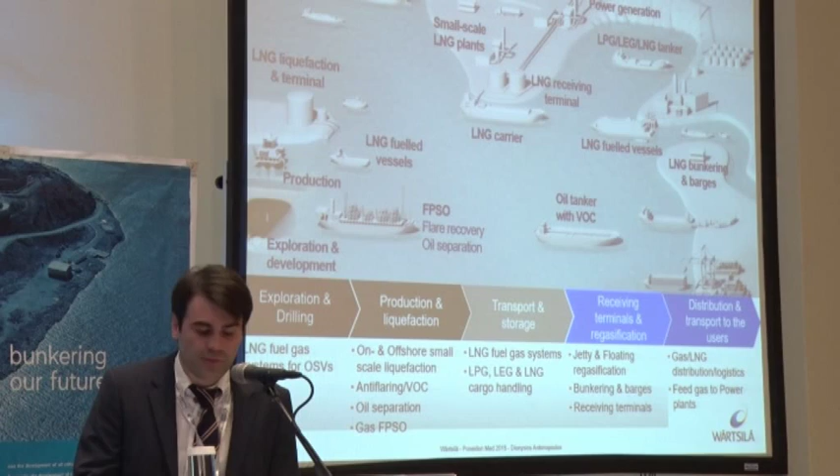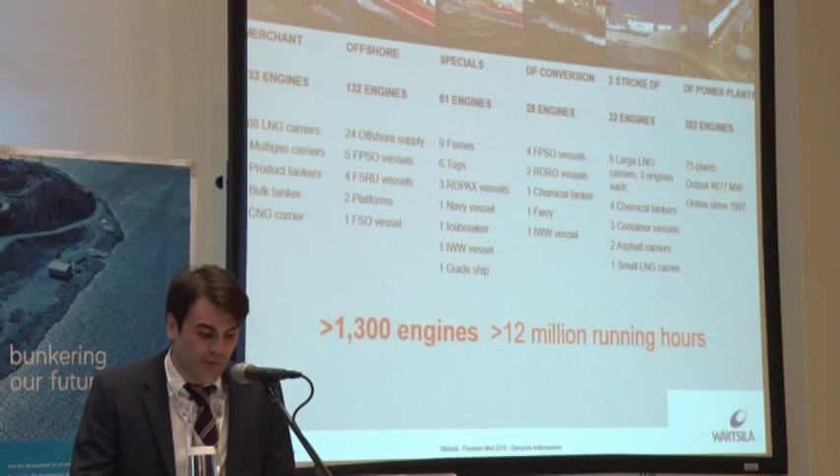Why LNG as marine fuel? This has been discussed several times today. Of course, it offers a fuel compliant with legislation and emissions, and it can be cheaper. For new building, all major ship designers are able to offer a vessel with LNG as marine fuel for many merchant vessel types. Wärtsilä has very extensive experience in dual fuel applications, with many accumulated hours. We have more than 1,300 dual fuel engines, and we have accumulated more than 12 million running hours.

And on this, I would like to state that we have many Greek LNG carriers that are equipped with the dual fuel Wärtsilä four-stroke engines. It has been very impressive, the investment of Greek owners from 2010 onwards in LNG carriers, and nowadays they have approximately more than 10% in terms of number of vessels of the global LNG carrier fleet. With the forthcoming deliveries, this approximate 10% will rise. So it's quite impressive what the Greek owners have achieved.

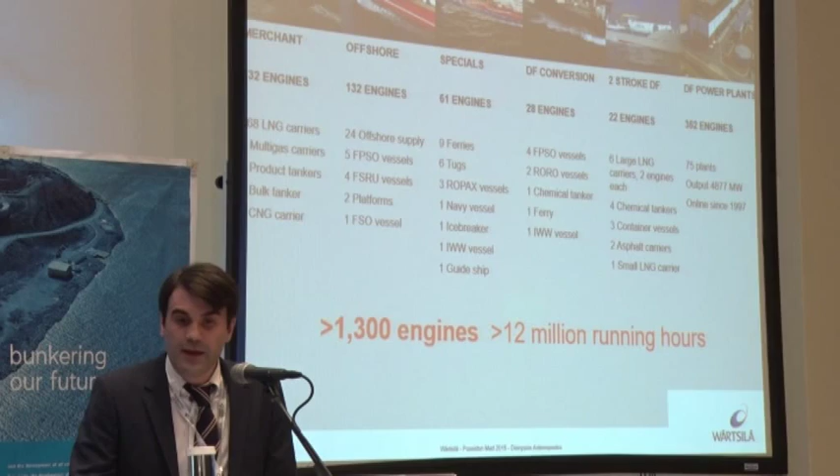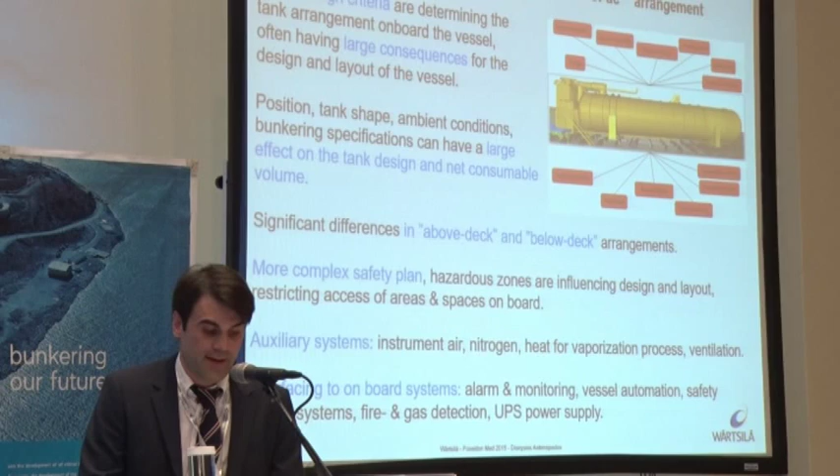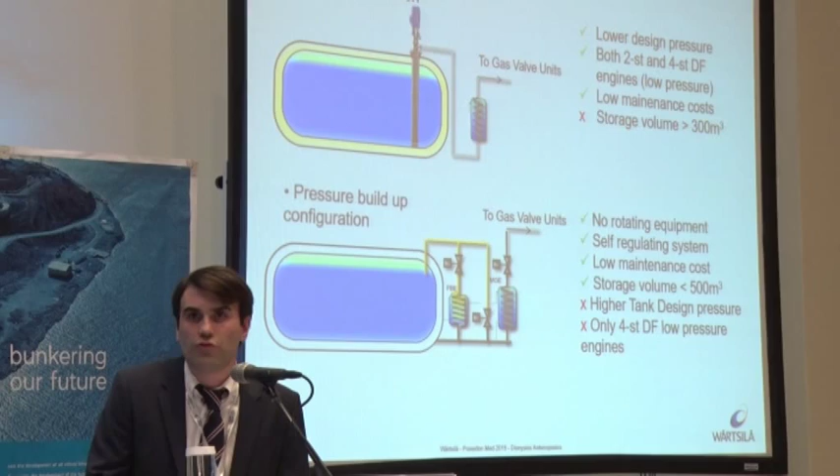The challenges of LNG as marine fuel. As has been mentioned, it has certain challenges. Efforts from many different parties, such as class societies, manufacturers, and others, have made LNG feasible as marine fuel. Especially for conversion, integration of various systems is a challenge, but with good preparation, this can be overcome. Many design criteria determine the tank arrangement on board the vessel, often having large consequences for the design and layout of the vessel. There is a significant difference between above deck and below deck arrangements. We have two types of tank process systems, one with pump and one with pressure buildup. Each solution has advantages and disadvantages.

Now, regarding conversion, we can proudly say that we have achieved the world's first gas mechanical conversion, and this chemical tanker has been converted from conventional diesel fuel to LNG. Two tanks have been placed on board, each having a capacity of 500 cubic meters, and of course the engines have been converted in order to be able to burn LNG. The conversion work lasted 10 weeks from the arrival at dock to handing over the vessel to the owner after successful first bunkering and gas trials.

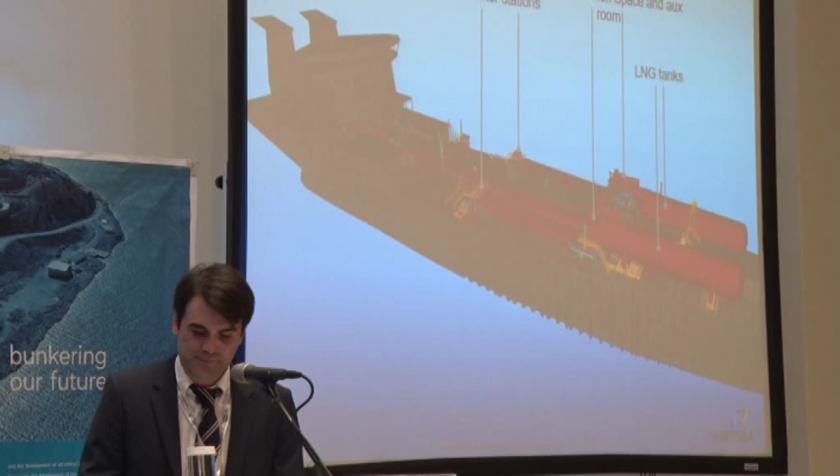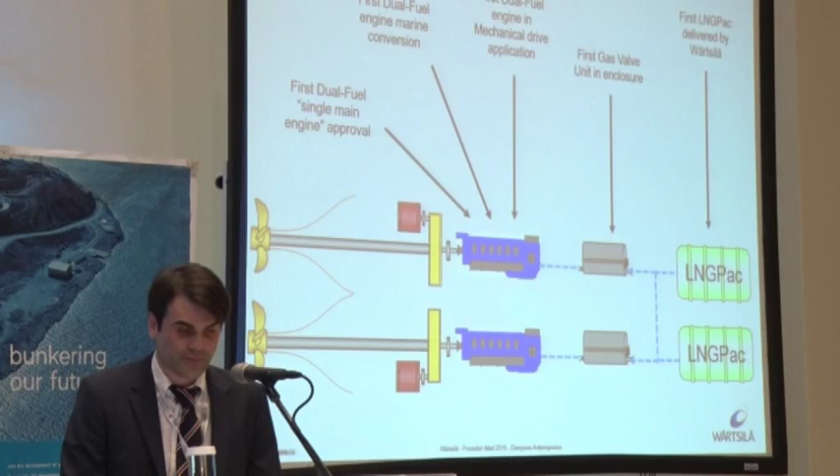On this slide, we can see the bunker station, the LNG tanks, as well as the tank connections. It's also worth mentioning that this vessel, after the tanks were installed on deck, due to the trim by the bow, performed better than previously. This project had many different firsts. It was the first dual fuel conversion, the first LNGPac delivered by Wärtsilä, as well as the first dual fuel mechanical drive. Here we can see the gas valve unit in an enclosure. This was also a first for Wärtsilä, and this gas valve unit regulates the gas pressure to the engines.

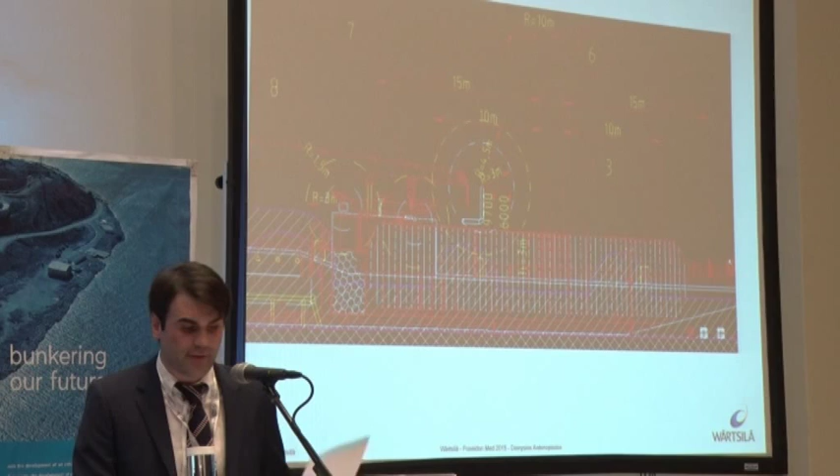Cooling, bunkering and risk analysis were done. The hazardous zone plan, where all the hazardous areas have been identified. The engine conversion alone was completed in 4 weeks. About bunkering, as we have seen previously, we have truck to ship, station to ship, or ship to ship. On this slide, we see a complete arrangement of station, tank, engine, and evaporators. The bunkering requires a certain procedure: first inerting the lines, decreasing the pressure in the tank, then filling, and then inerting the lines again.

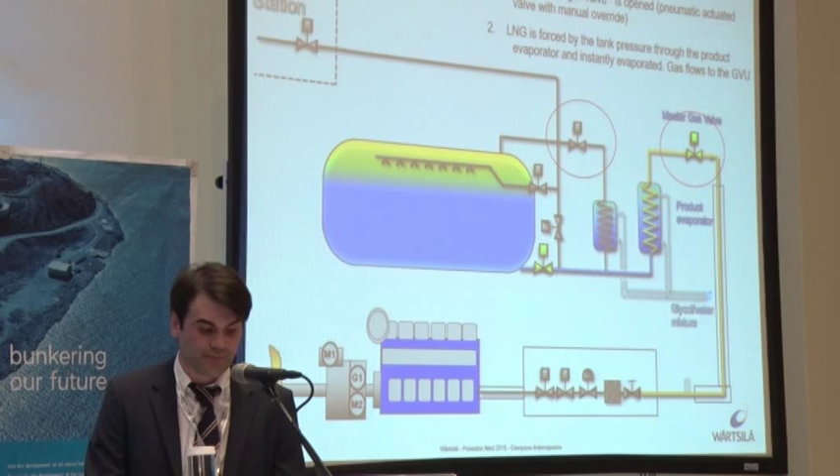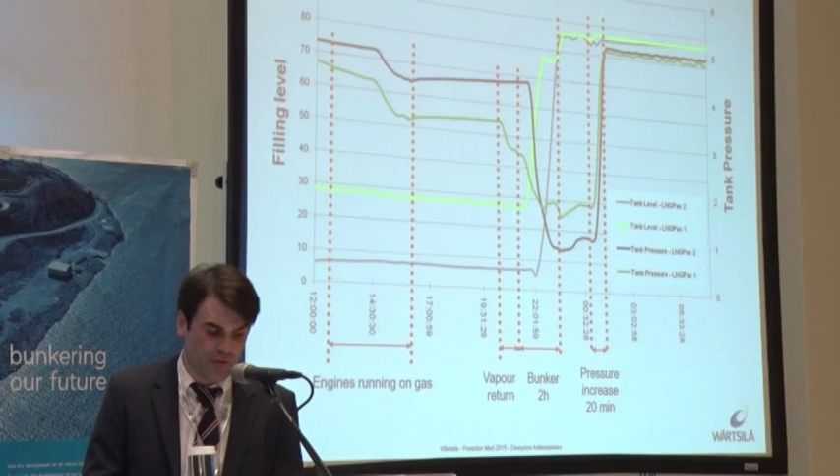Here we can see a graph from bunkering of Bit Viking, where we can see the time required with the tank pressure and the filling level. We can see that in order to bunker, you have to drop the pressure in the tank, then start filling, and then the pressure has to rise again. Another very important conversion reference for Wärtsilä is a Ro-Ro container vessel in the US. It's the Totem Ocean, and it will be sailing in 2016.

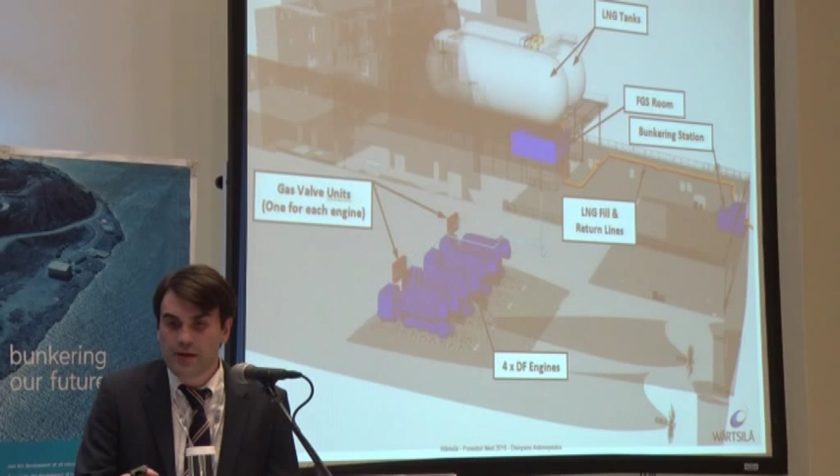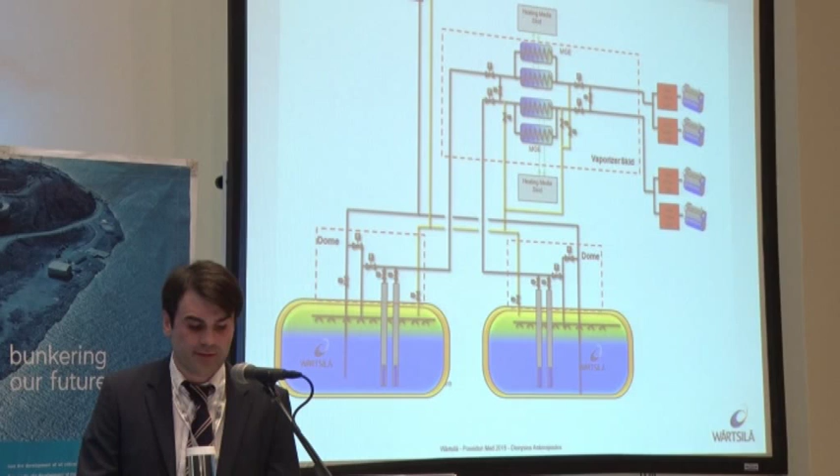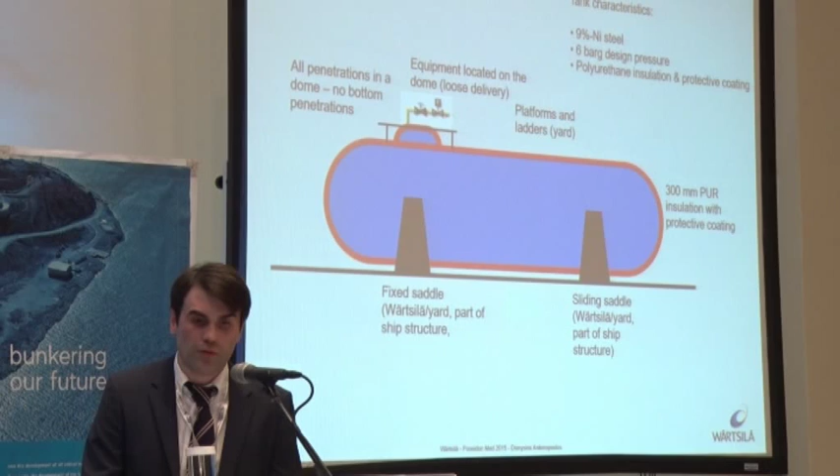This Ro-Ro container vessel has 2 tanks of 1,100 cubic meter LNG capacity. Here we can also see the engines and the bunkering station, as well as the lines. On this slide is the process overview showing the tanks, the evaporators, and engines. Here we can see the tank used on this conversion. This is a single shell tank, and we can see here the right foundation, which is moving because of the expansion of the tank. So one foundation is fixed and the other one is sliding due to the expansion. And all of the penetrations are in the dome, so we don't have bottom penetrations.

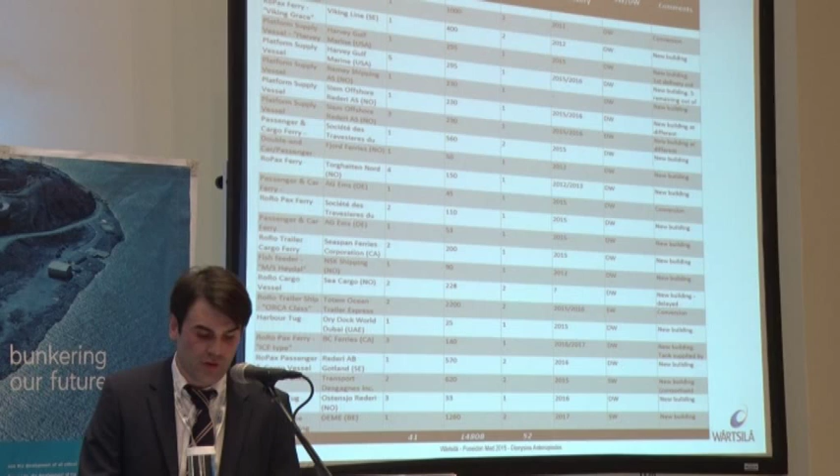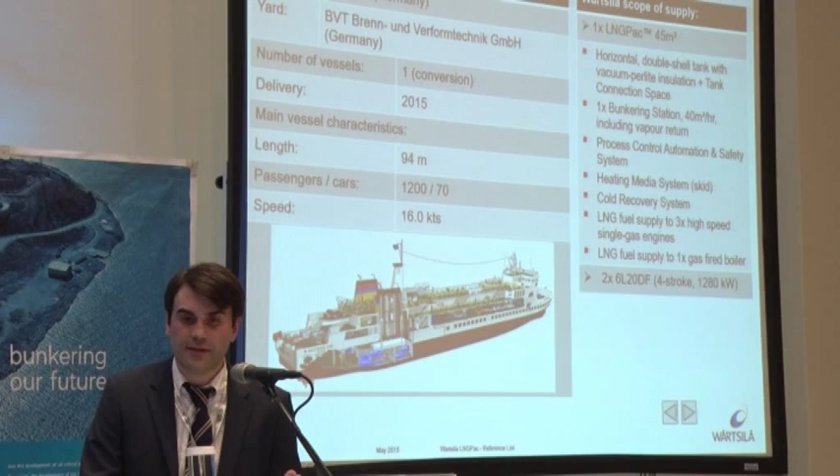Here we can see a reference list of the LNG tanks. In total, we have 52 tanks in 41 vessels, the majority in new building vessels, and the majority double wall. And of course, we have them in various types of vessels. Here we have another vessel. This is the MS Ostfriesland in North Germany, and it has Wärtsilä dual fuel engines as well as a 45 cubic meter LNG tank.

So to conclude, we can say that in order to introduce LNG as marine fuel, the necessary experience in both new building vessels and conversions already exists. Efforts have been made by all stakeholders, and by having LNG, not only can a positive effect on the environment be achieved, but also more efficient vessel operations.